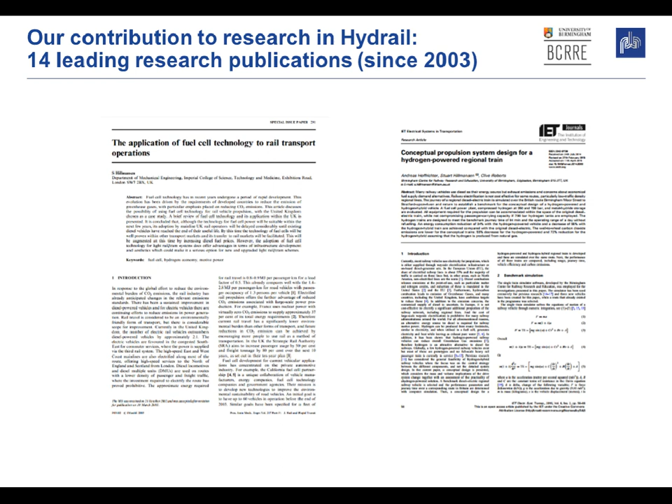We started off at a very small scale, and this is our small scale. This was the first hydrogen train to run in the UK. It was actually developed for the IMechE Railway Challenge, and it's competed on a number of occasions.

And it was a good educational tool, not only for the students that were involved with the IMechE Railway Challenge, which, by the way, is a fantastic event, no matter what type of locomotive you put into that competition.

It was also enough to start sparking interest in the wider rail industry. So the Railway Challenge, if you've not had any experience of it, enables teams from various universities and commercial organisations, industry organisations, to build a small gauge locomotive that competes in a number of challenges to achieve an overall winner.

That includes its pulling performance, braking, ride comfort, noise. I think there's probably about a dozen categories now that these trains are put through. So a fantastic event, and if you're in the rail industry and you're looking for something to challenge your students and graduates and apprentices, I would heartily recommend that. There's nothing like building a vehicle from scratch and then testing it to get that learning experience and also the teamwork experience. So that's my plug for the Railway Challenge done.

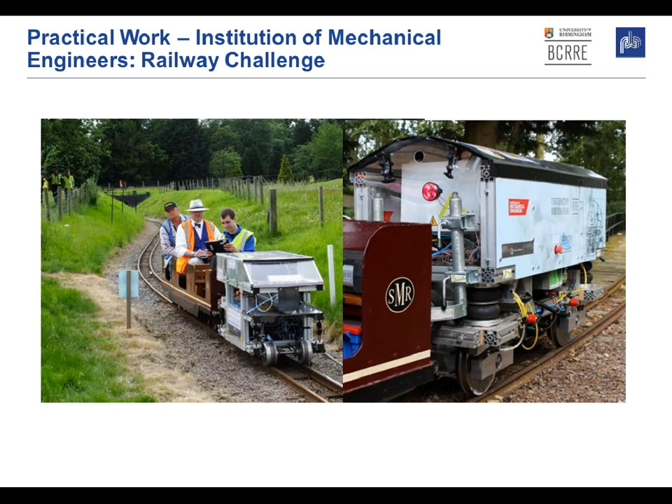So a fuel cell. A fuel cell is a device that takes hydrogen and combines it with oxygen from the air, and it generates electricity. It's an electrochemical reaction. There is no combustion, but you do get waste heat. It's very quiet, and over the years fuel cell technology has improved so that in terms of lifespans they're getting better and better and can now challenge diesel engines. The fuel can be generated from multiple sources, so it is possible to do zero carbon generation.

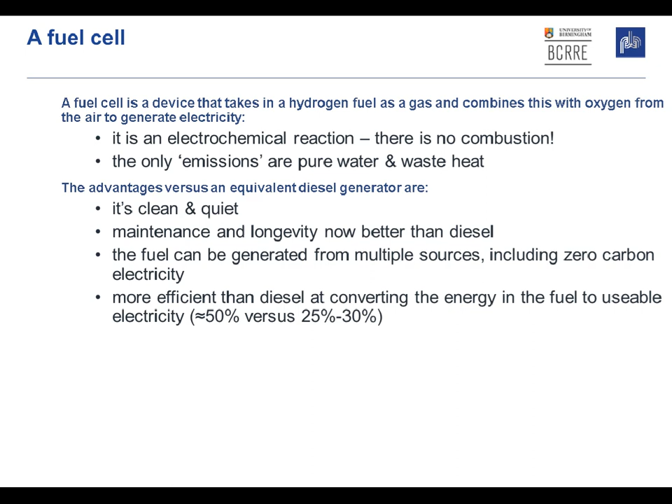But within the fuel cell itself, the hydrogen is fed in at a very low pressure, probably 1 or 2 bar, and it enters via an anode, which strips the electrons from the hydrogen. The positively charged protons then pass through a membrane to the cathode, and the negative electrons are forced through an electric circuit, which generates the electricity. Then the electrons and protons get recombined on the cathode side, and they also combine with the oxygen from the air to produce the byproduct, which in this case is water and heat.

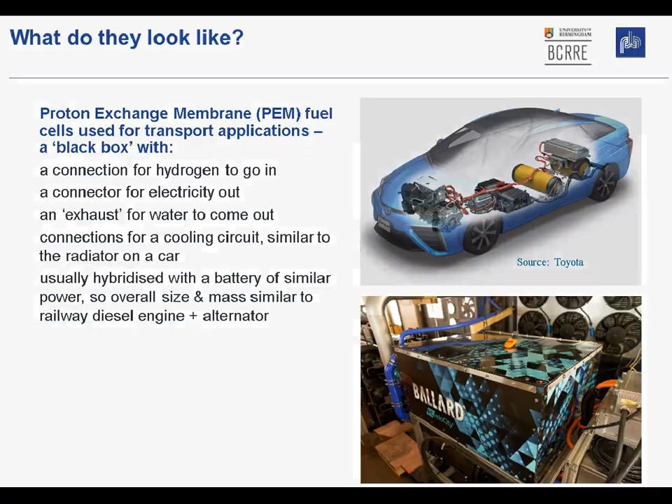So we have competition for hydrogen. Diesel's got some significant advantages. Diesel engines are much cheaper to buy than fuel cells. They're made in much larger volumes and in a variety of applications. They're very much a well-known, proven technology for rail applications, and it's easy to get fuel. It's available everywhere. Diesel is far more energy dense than hydrogen. It's approximately, well, because it's a liquid, first of all, it obviously is a lot more dense, so you can get about 10 times the same amount of energy out of a diesel tank, size for size.

OLE is also a competition for hydrogen, and that is probably the best option in terms of decarbonising for the future. It's quite efficient, about 80% efficient, and the only real downside to it is the fact that the costs of implementing extensive OLE networks, overhead power line networks, is very high, as well as you also need to buy the modified rolling stock to suit it if you're going to electrify from scratch. So at the moment, electrification for the UK network's circa 50%, 55% maybe. So there's quite a bit of opportunity to look at alternative power sources, as well as allow for additional electrification in the future.

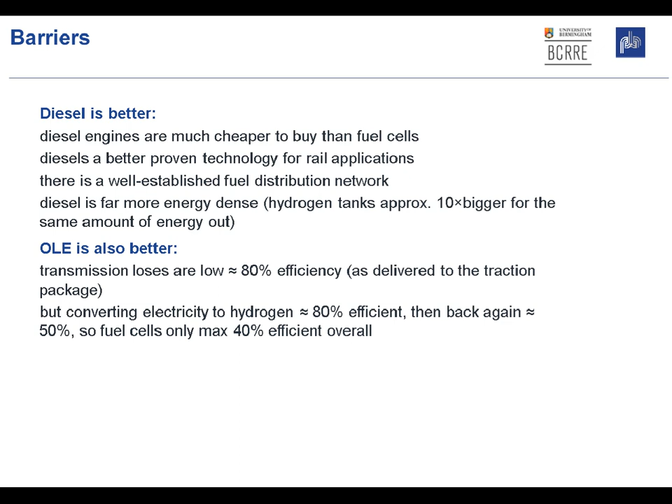So what's the drivers for hydrogen? Air quality and climate change is, of course, of concern to everybody. We can't ignore the fact of mankind's footprint on the planet. We also need to consider that the UK is changing its generation mix for how it produces electricity. We're seeing much more renewables, probably far more than was first anticipated. The rollout has been much higher than first thought. There's also considerations for fuel security.

OLE expense is listed here, and I think that needs a little more explanation. Overhead power line systems are very good for intensive, high-speed use. If you're going to run a train all day, every day, at 125 miles an hour, there's nothing to beat having overhead power lines. The problem comes on more rural routes, or feeder routes for the major routes, where the intensity of the service isn't so high, and you have the cost of possibly going on more twisty routes with elevations that make putting OLE much more expensive. So the business case for OLE on some routes would not be very good.

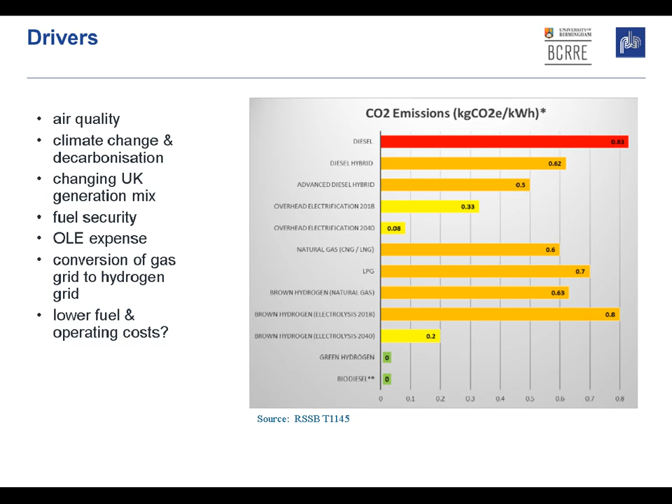When we first talk about hydrogen, everybody says, yes, it's very dangerous. And it is, in so much as it's explosive from about 4% mix into air. So it is a very flammable gas. We also need to store it at quite high pressures to get the gas into storage in the quantity that we need. For rail applications, we're probably looking at 350 bar pressure in the tanks. For road applications, for cars, you're probably looking at 700 bar. So that is a significant challenge. However, there are processes and standards in place that have regulated how these storage systems work. But unlike diesel, if there's a leak, the gas is much lighter than air. It disperses very, very quickly.

The fuel cell itself - the fuel is fed into the fuel cell at very low pressures, so it gets reduced from the tank system. We supply from the tanks at 350 bar to the fuel cell at around about 8 bar, and then into the working membrane area at around about 1 or 2 bar.

The rail industry has taken some comfort about using hydrogen by the fact that there's been road applications, and there are standards that have been built for transportation, notably EC 79, that have dictated how these systems should work. So whilst it needs care with handling, the processes, procedures and requirements for the systems are now well known. If the railway adopts these standards going forward, they're proven, and we feel like it is a good way forward.

And the rail industry has actually got form using high pressure vessels, because if you think of steam engines in the past, which were at the very front of the train, they were certainly running at high pressures, and steam expands about 1,000 to 1. So it's something that the rail industry is used to, even though at first it would have initially thought it wasn't - that it was something new and novel.

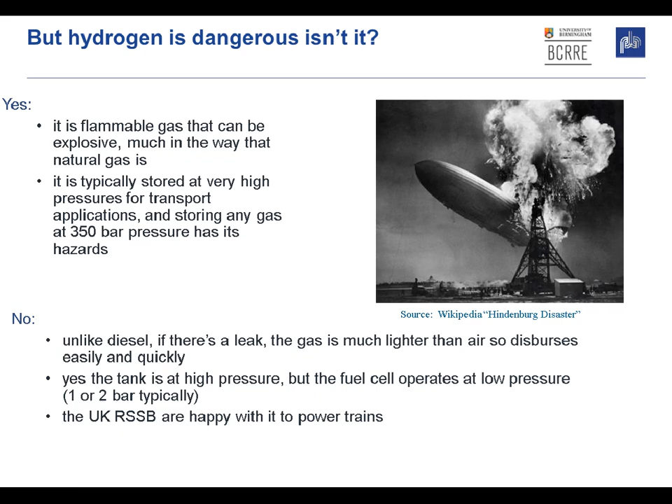So we do need a fair amount of hydrogen. We've calculated, looking at various modelled duty cycles, that we would want about 65 kilograms per day for a vehicle running a 500-mile range at about 75 miles an hour. So you need many tons for a whole fleet of trains. There's different ways of doing this. We can strip out and reform the hydrogen from natural gas, we can use electricity from the grid, or we can do this locally. Now, with the decarbonisation mix and the energy mix going on in the UK, the opportunities for more localised creation of hydrogen in a sustainable manner will likely be the way forward. And if that happens, we're likely to start to see the fuel cost drop lower than diesel in the future.

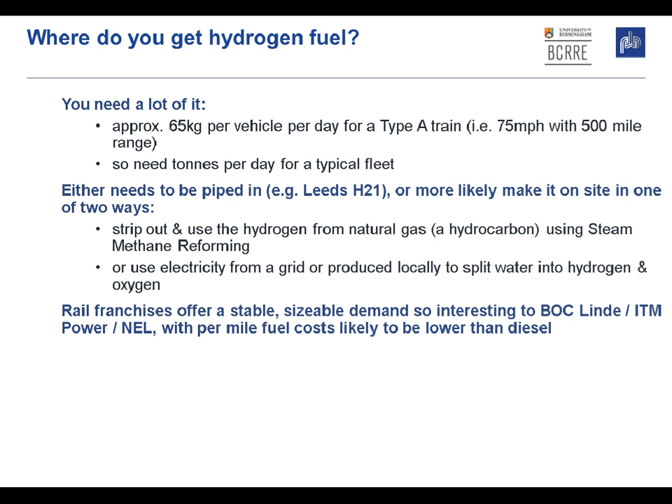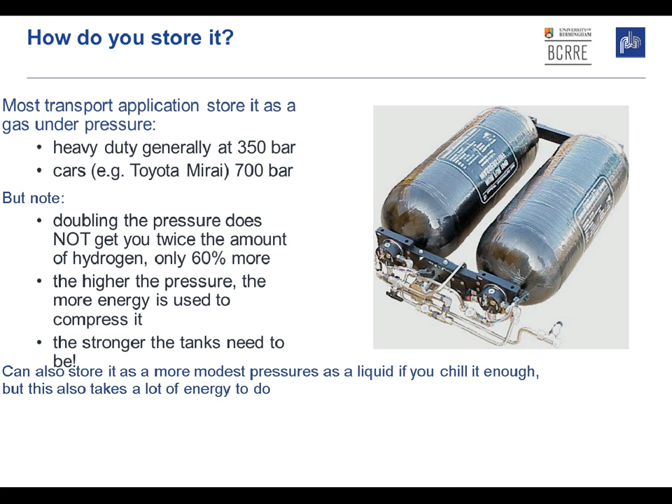So our storage systems - I've mentioned the pressures before. In our HydroFLEX train, we have been running the tanks at 350 bar. When you double the pressure, you don't get double the amount of hydrogen - it's only about 60% more, and you use more energy compressing the gas. Also, the tanks need to be a lot stronger. There is an opportunity to store it as a liquid, but to do so takes a lot of energy, and that's really the sort of application you're most likely to see in aerospace. A good example of liquid storage of hydrogen would be the space shuttle main engines, the big fuel tank. So not really the sort of thing we'd want on a train.

So what is HydroFLEX?

HydroFLEX, its name is based on hydrogen for the hydro part, of course, and Flex is part of Porterbrook's innovation fleet of trains. So Porterbrook is a partner with BCRRE.

We launched that partnership in September 2018 at InnoTrans, the big international rail show held in Berlin. At that point, we hadn't done any pre-work. This was an opportunity to work with Porterbrook, who are a major fleet owner, a ROSCO, and they offered us the opportunity to take one of their existing Class 319 trains and turn it into a hydrogen technology demonstrator.

We've put all of the equipment inside one of the coaches as opposed to underneath it. It was deliberately not done as a production intent type of vehicle. We wanted it to demonstrate that hydrogen was feasible, that the standards and approaches we could take would find approval from the rail industry.

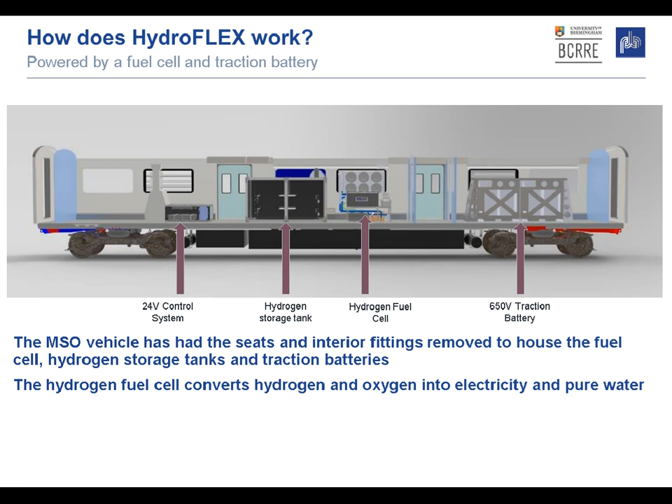So the tanks are carbon fibre, run at 350 bar, 20 kilograms of hydrogen, which allows us to run the fuel cell for about 4 hours.

EC79 is the standard for the hydrogen systems, and it's very much about putting in the right safety requirements. So there's things like flow regulators, shut-off valves, fire protection. These are very important to make sure that we handle this fuel correctly and consistently correctly.

It also includes detection systems, and in that respect, once you've got these systems in place and it's maintained and designed, installed and maintained correctly, the system is robust, and we have high confidence.

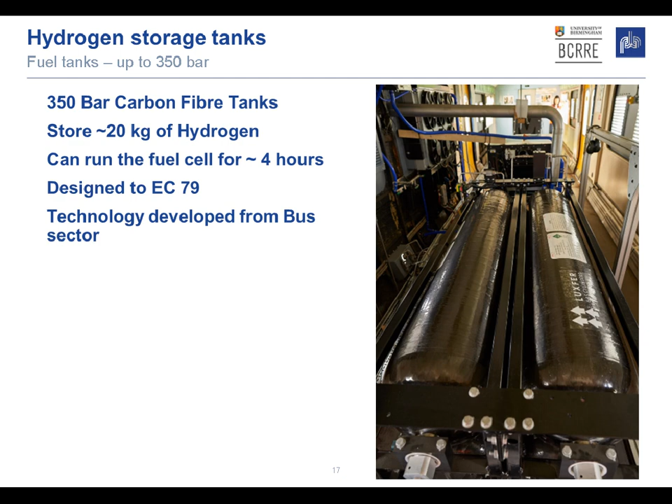The fuel cell - we've got a 100 kilowatt fuel cell. It takes in hydrogen at about 8 bar, but it does reduce that further when it actually puts the hydrogen into the inner parts of the fuel cell.

We control the outputs of the fuel cell using our control system, and the balance of the plant is what I was mentioning earlier, that we basically can control the battery and the fuel cell together and how they combine and work.

It also includes air handling equipment, so you need to put air into the fuel cell to enable the hydrogen to be recombined with the oxygen to make water, the steam output. You can also see the cooling system, the fan system on the right-hand side, and there's a DC to DC converter as part of the traction power package.

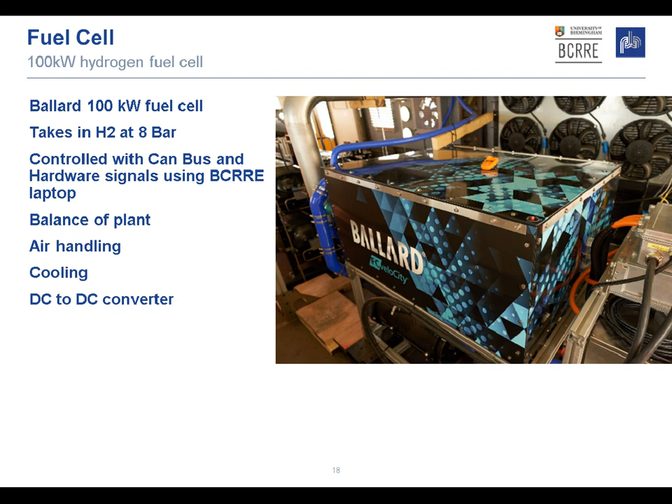This is our lithium-ion battery pack. There's 24 modules, two actual batteries, with a system voltage of about 650 volts. When these two systems combine, we still only have about a third of the power we could currently get off the overhead power lines. That's because we built this as a demonstrator, not designed for conventional passenger service. So we concentrated on understanding the technology and getting the most out of the control system, and how these systems will all interact with each other.

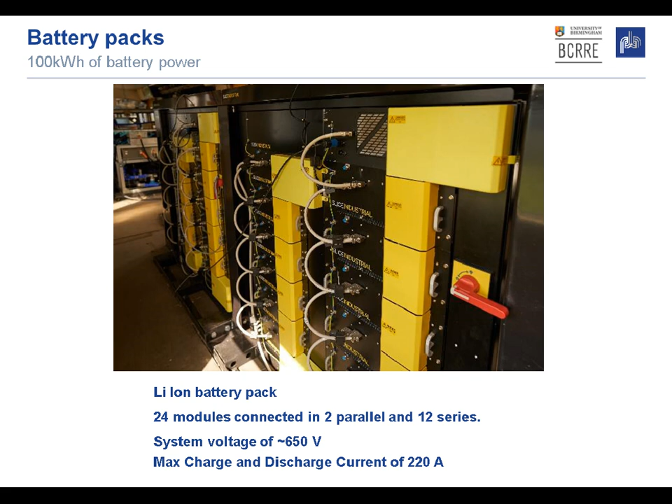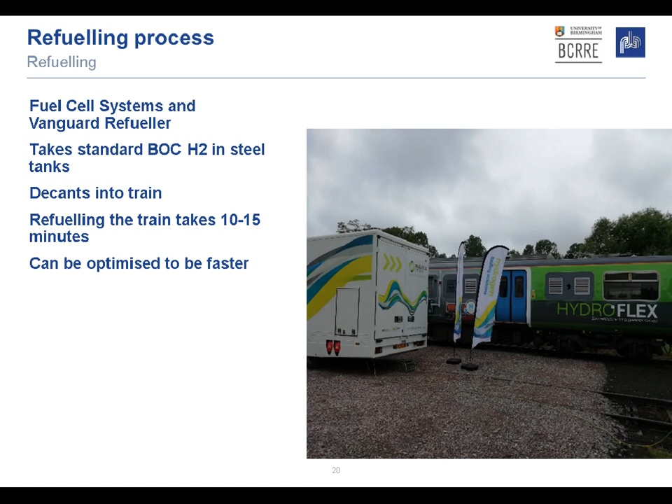We've been undertaking some running already at Long Marston, at the Quinton Rail Technology Centre in Warwickshire, where the train is based. We've done lots of running around that test track, but the problem is that it's quite low speed - we're limited to about 25 miles an hour. Also, because of its loop nature, we also have different rolling resistance, so it's difficult to determine the full performance of the vehicle at this point in time. We have modelled it, we've got some predictions, and I'll explain a bit later where we are going to go with that.

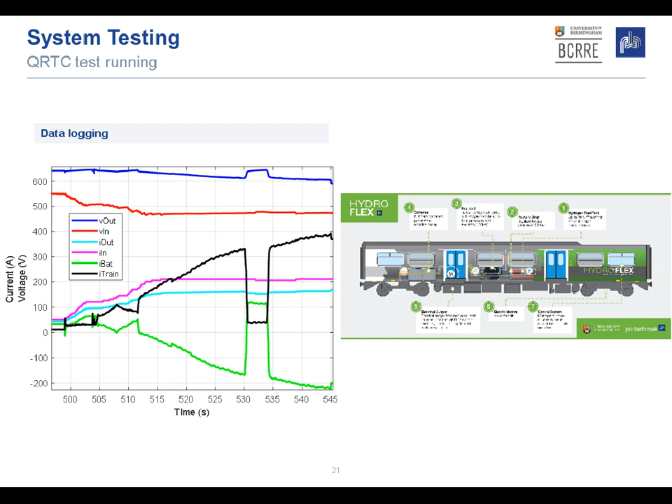So what's next? We went for some InnovateUK funding. They had a funding call called First of a Kind 3, which allowed us to go for mainline testing. I mentioned the restrictions we had going around Long Marston, limited speed, so we wanted to see what the train would do on the open network. To do that, we had to go through the full approval process - you can't take a prototype train out onto the UK rail network without going for approval.

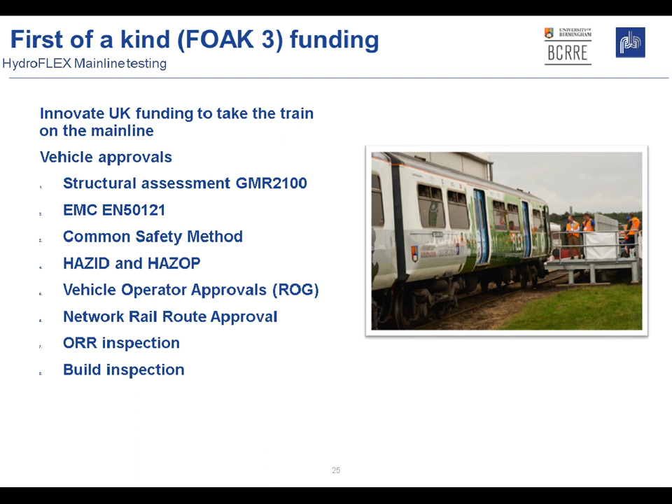So looking to the future, sorry, I've jumped ahead a little bit. I'll just say about the mainline testing. We're about to do the mainline testing right now. We've got a program of going onto the line, starting around the Cotswolds line. We're hoping to see an ultimate performance of around about 50 miles an hour, but it will enable us to

Routes that potentially act as feeder routes or are routes that haven't been electrified yet. Now, some of these routes, as I previously mentioned, it will be a long time before it will be possible to justify electrifying them. But at the same time, we do want to decarbonise. We do want to get rid of diesel where possible. And there's also the opportunity to, when vehicles come onto the major routes, the electrified routes, if we have bi-mode trains that could switch from, say, hydrogen onto using the electric power source, that would also enable

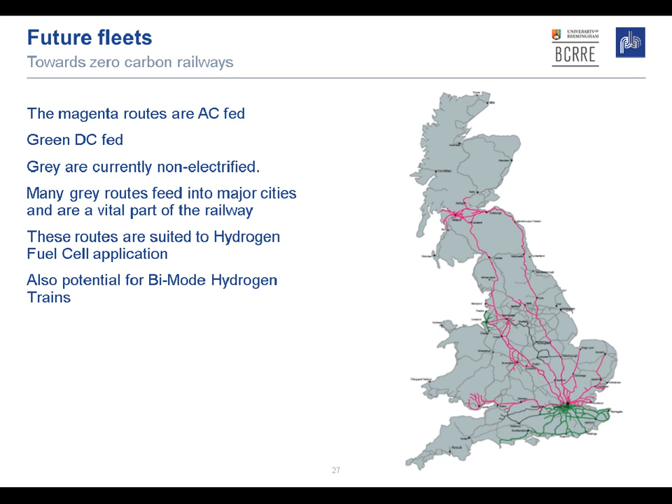So that's the end of the presentation. I'd like to open up to any questions if you have some.